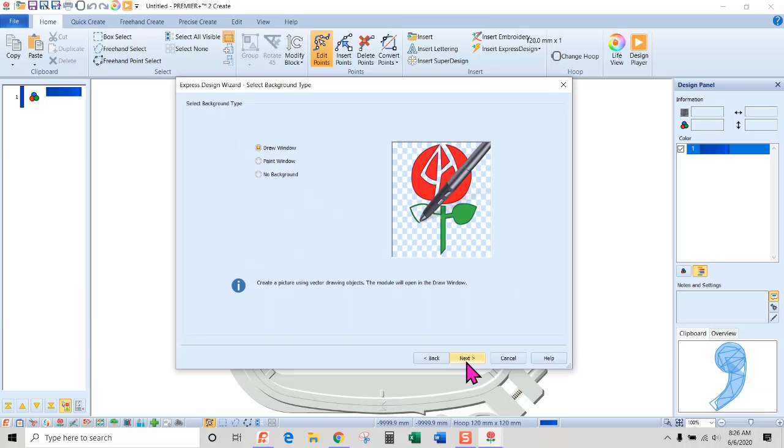I'm going to select File, then New Window, so I have a brand new window for the whole thing. I'm going to say start a new design with no picture. It doesn't really matter because we're going to do the quick version of this. We're going to do no background, and I'm just going to do the 120 by 120 hoop.

The first thing I'm going to do is create the box, the main part of the house. I'm going to go quick create, these are pretty simple little things. I'm going to make sure pattern fill is not selected. I have a satin line. I'm going to go to fill area and line, and set that for a width of 3.0. It's about an average of what you want to use for doing satin stitches around your applique. Now you can make this raw edge and just make that a straight stitch instead.

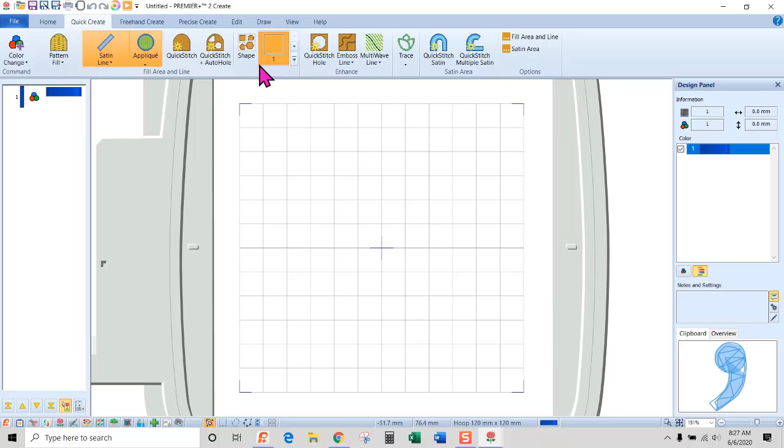So I'm going to tell it I want to do an applique, and choose a shape. I've got the square I'm going to use, and I'm going to do select shape, and it's going to pop on my window. So I need to make him a little bit bigger, so I'm going to hold my control key and drag a box to make it a little bit bigger.

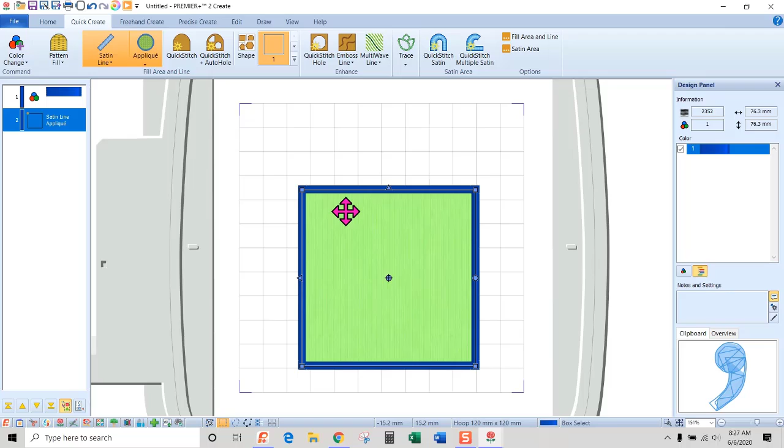So now I have the main part of the house, but this is the satin stitches that we want to go away. Now this isn't the only way to do it, this is just a way to do it. But the first thing I want to do is take that satin line applique and break it into separate pieces.

So I'm going to go over to the edit tab and say break apart. So what it's going to do is break it apart. So I have a running stitch, it's going to be the command to lay down my applique fabric, then it's going to do the double stitch, and then it's going to have a satin line here. I'm going to get rid of that one because I don't want it.

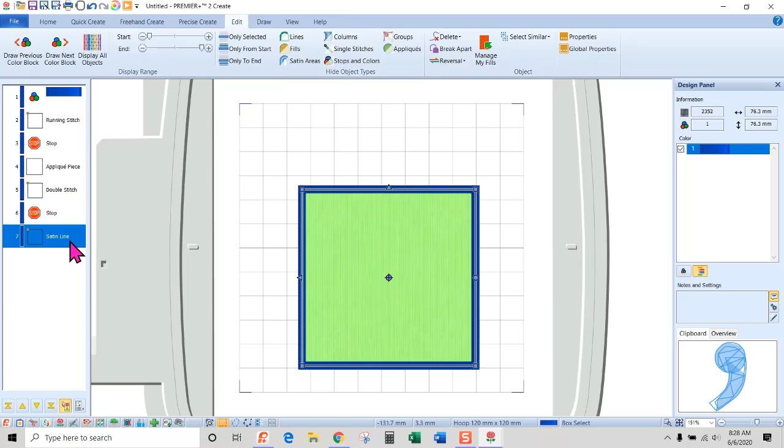I want to do my own thing, so I'm just going to delete that. I can right mouse and delete. So that one's gone. Now I want to actually create my own applique that's going to go just down this side here and not across the top.

To do that, I'm going to go to Precise Create. I've got satin line already selected, I don't want applique, I don't want pattern fill. You can double check this and make sure it's still set for 3 if you want to. I'm just going to create an area.

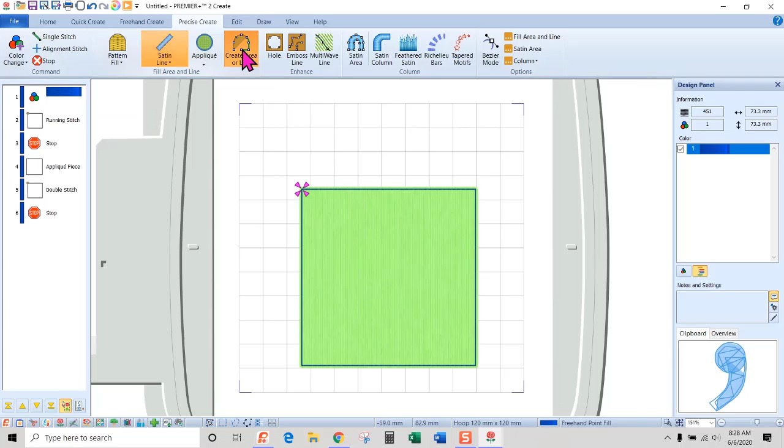So I'm going to select here, and if you notice there's a little purple spot, and that's the basic first spot where everything's going to start to sew. It's going to be a really small jump stitch to here, so I don't really care. I'm going to hold my control key because I want good square corners. I'm going to click, click, click, and click just down a little bit because I don't want those to go all the way to the top.

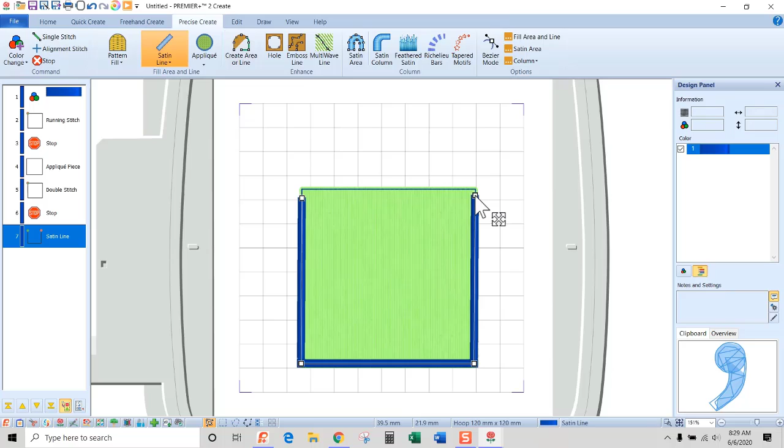Now I want to do a right mouse button, and if I do that, I can adjust these just a little bit. I'm just not going to. Just a little bit. So now I just need to do the roof.

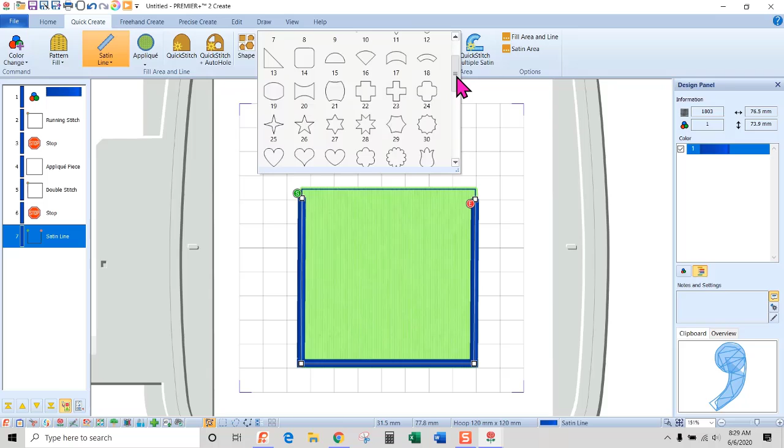So basically the same thing. I'm going to go over to Quick Create, choose something totally different, and grab another shape. Again, these are just quick ways to do this, not necessarily the way you have to do it. It's just an option. I'm going to select that one.

Again, I want an applique, and I've already got my fill area and line set. So I'm going to click on shape, and it's going to do this. I need to take it, and I'm not going to hold my control key this time. I want it to drag out this way, and I'm going to drag this out and make it a little bit taller. Okay, so now that's basically all there is to it.

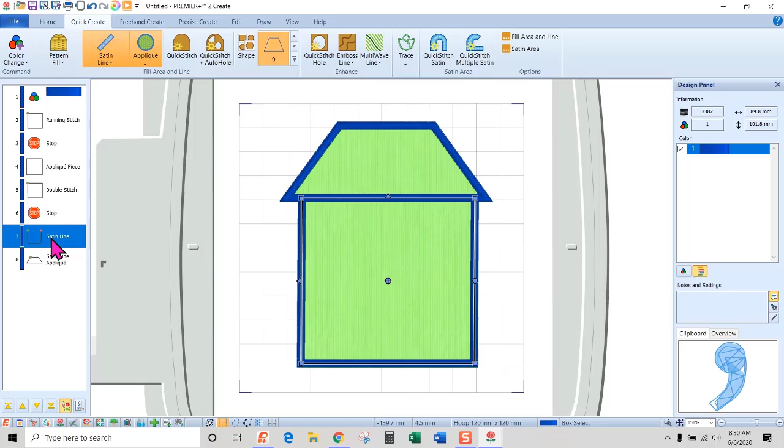So now what's going to happen when we stitch this out - I'm going to change the color just so you can kind of see this. Where it says the satin line here, I'm going to right mouse and say insert a color change because I want that to be different, and I'm going to choose a brown. Okay, and so we're going to watch it play.

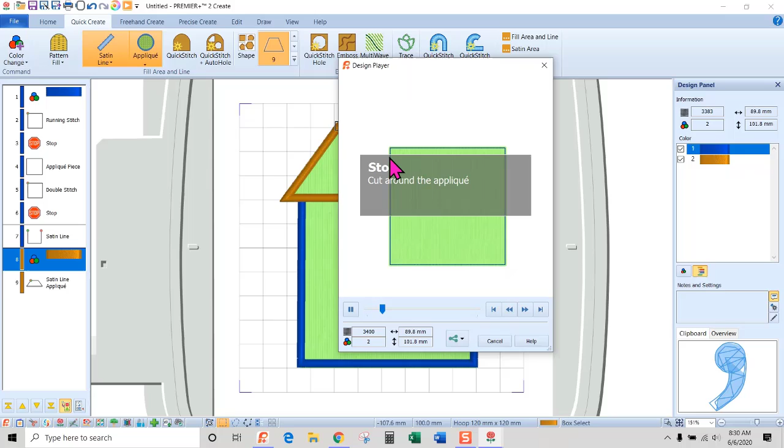So it's going to do the placement line for your fabric, and then once you lay your fabric down, it's going to do the next set of stitches. Then it's going to say cut around your fabric, so you can actually cut along here, and here, and here. And then it's going to do that satin line.

And now it's going to do the roof. So I think you get the idea of basically how that's done. Now I added in windows and some other things, but this is the basics of how to do that. It's my way to do it, not necessarily the final way. There are other options out there. I hope that helps explain the one question you had. This is done in Ultra, in the Create module, so it's one of those things you can do there.